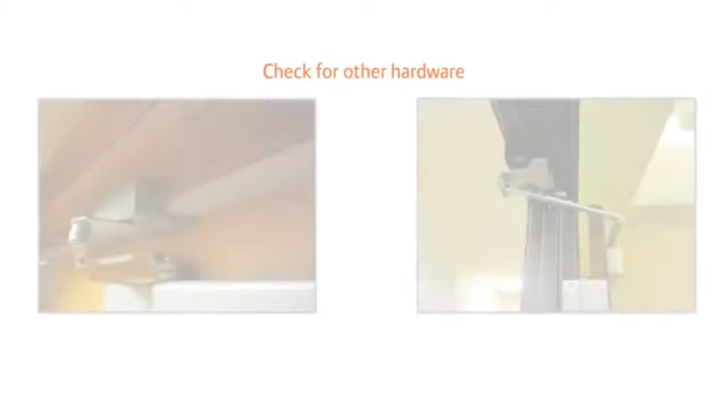If this is a new construction project, check the hardware schedule to confirm you have the correct closer for the opening. Check the opening for other hardware mounted on the top jamb. Items such as a coordinator or overhead holder can affect the installation of the closer, and special templates may be required.

Ensure the door swings freely, fits into the frame without binding, and that any latching hardware engages easily. There should be a 1/8 inch gap on the top and sides between the door and frame.

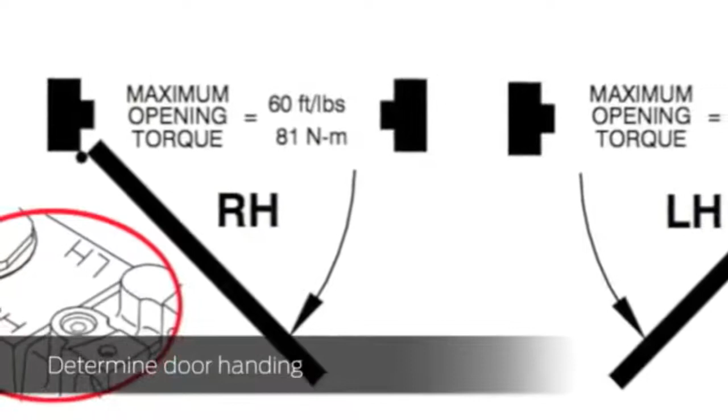First, determine the handing of the door. This chart, found in your installation sheet, can help you. Then, determine how far the door opens. This door opens to 90 degrees. Affix the self-adhesive template to the door, aligning the edge of the template with the hinge and top edges of the door, as shown on the label.

For doors that open from 100 to 140 degrees, place the line on the template along the hinge edge of the door, as shown on the label. For doors with pivots or swing clear hinges, locate the closer and shoe from the pivot point of the door.

Using the center punch, mark the 6 locations to be drilled on the door and frame. Drill 1/8 inch pilot holes through the template at all marked locations. Remove the template from the door.

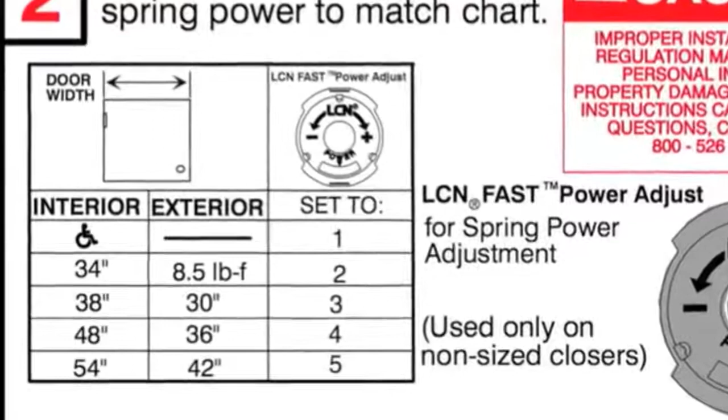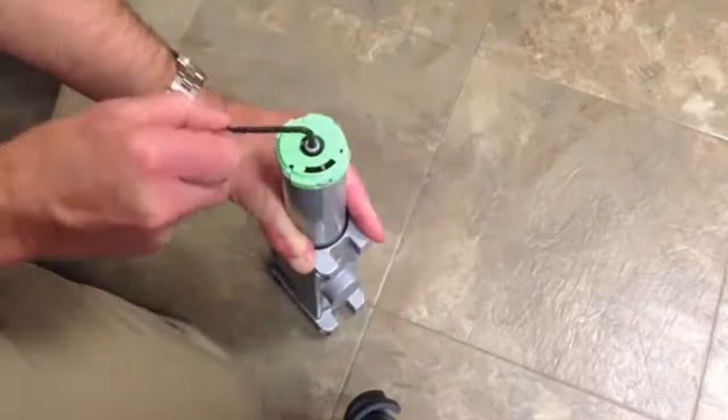The LCN 4011 spring power can be adjusted to provide proper closing force for your door. Please note, an improperly adjusted spring may result in personal or property damage. Using the chart in the installation instructions, determine the appropriate spring power setting based on the door width and the location of the opening. Adjust the spring to the correct number using the 5/32 inch hex wrench. Turn the screw until the proper number appears in the power window.

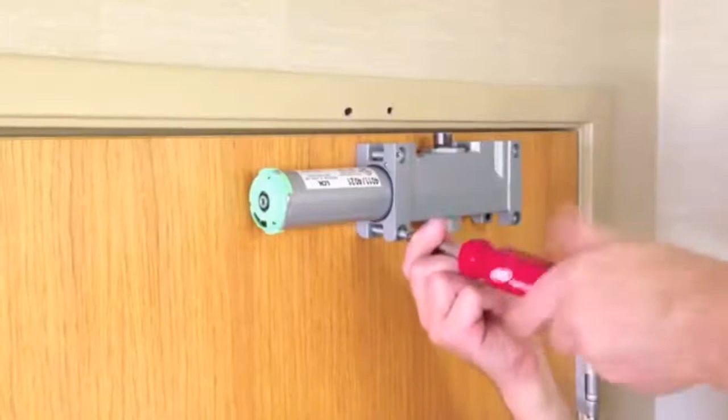Attach the closer to the door using the 4 screws. Self-reaming, self-tapping screws are provided as standard. Depending on your application, your supplier may have also provided wood screws, through bolts, and machine screws. Attach the rod and shoe to the frame using the 2 screws. Be careful not to over-tighten.

Attach the arm to the closer using the fastener provided. The arm may be attached to the closer prior to installing the closer on the door if it is more convenient to do so. With the door open, slide the arm over the rod and begin fastening the arm screw, but do not tighten. With the door closed, position the arm until it is 90 degrees from the face of the door. Then, tighten the arm screw.

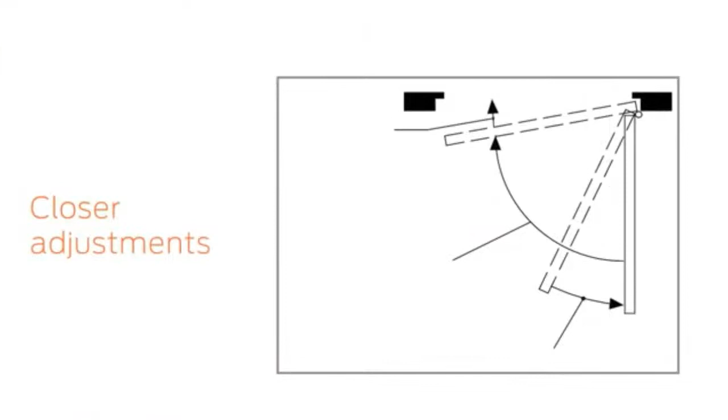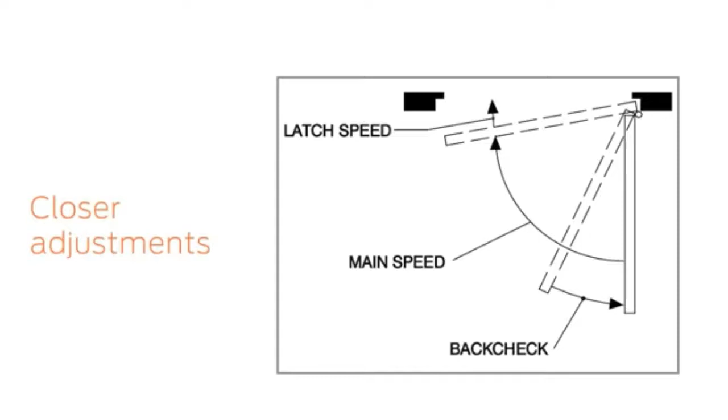Making adjustments to the closer allows you to control the motion of your door. There are 3 hydraulic adjustments that provide optimal door closer operation. The closer comes from the factory adjusted for a typical opening. Your closer may need additional adjustments depending on your installation requirements. To test the result of your adjustment, cycle the door twice.

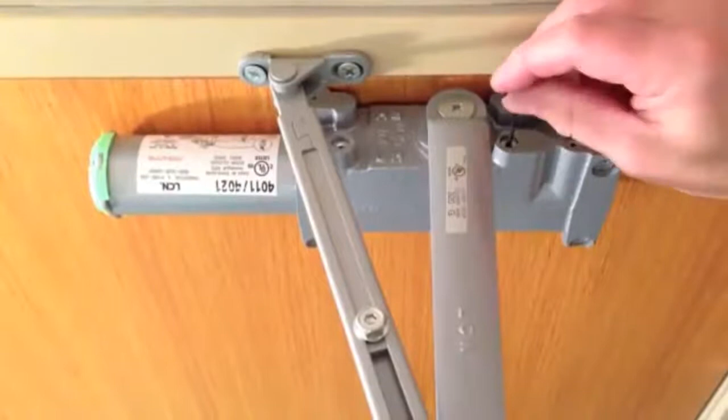Please note, do not back out the adjustment screws too far. If you are close to backing out the screw completely, you should feel increased resistance. Once you feel this resistance, do not back the screw out any further.

Back check is the hydraulic cushioning to slow the door as it opens. This usually starts at 70 degrees. The door will slow down to reduce wear on the door, wall, and hinges. Back check does not serve as a door stop. To adjust it, locate the back check screw, which is the screw farthest from the spring tube. Turn it counterclockwise 1/2 turn.

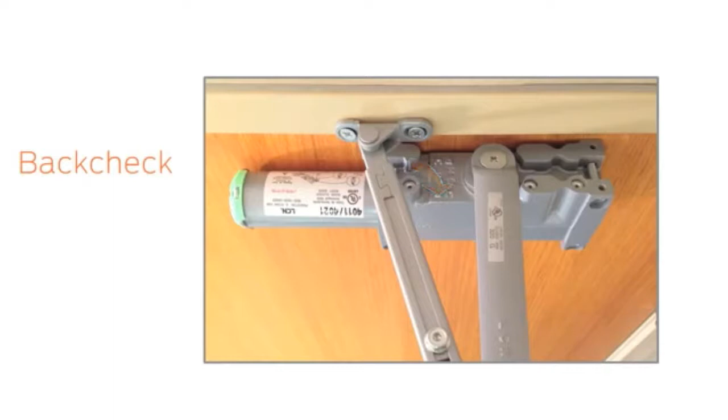Then, open the door to test. If additional cushioning is needed, turn screw 1/4 turn clockwise and retest. If less cushioning is needed, turn screw 1/4 turn counterclockwise and retest.

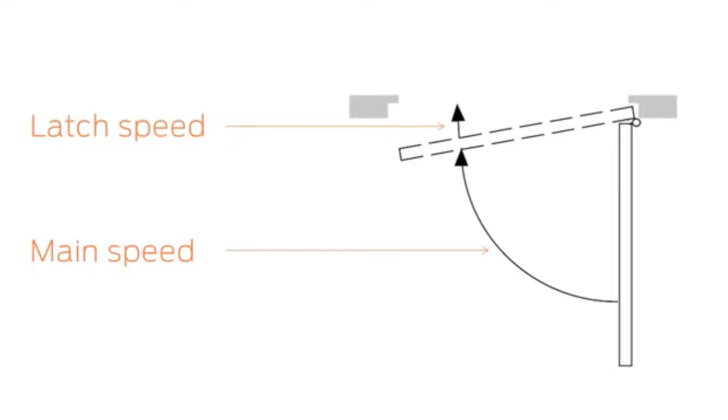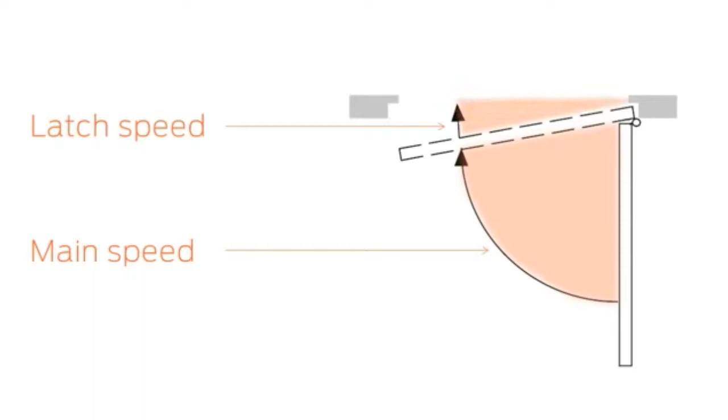The next two hydraulic adjustments are main speed and latch speed. The main speed is the speed at which the door closes from its fully open position to about 20 degrees. The latch speed is the speed at which the door closes during its last 20 degrees of closing. When setting these two closing speed adjustments, remember the Americans with Disabilities Act requires doors to take, at minimum, 3 seconds to close from 70 degrees to within 3 inches of the latch.

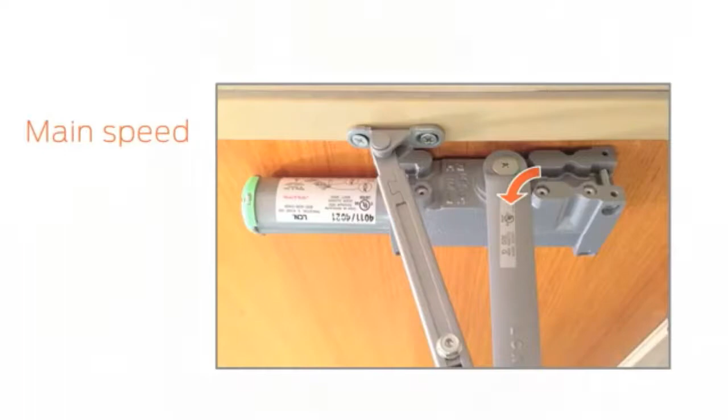The main speed screw is located on the front side closest to the pinion, where the arm is attached to the body. Make an adjustment 1/4 turn at a time, clockwise to decrease speed, counterclockwise to increase speed. Then, open the door all the way and release it to observe the closing speed.

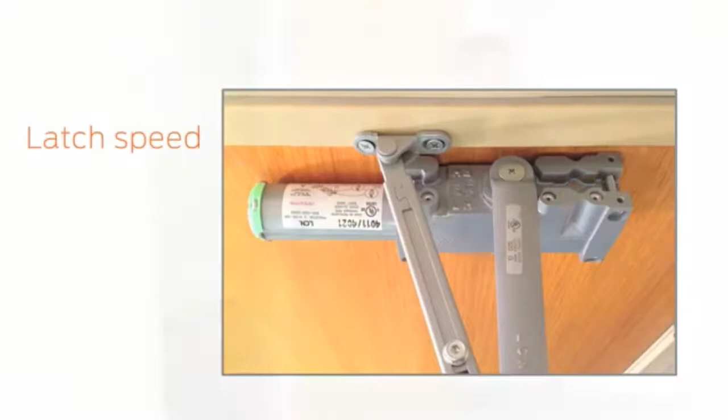Latch speed helps ensure the door latches properly. We recommend only small adjustments to latch speed. The latch speed screw is adjacent to the main speed screw on the front side of the closer. Make an adjustment 1/4 turn at a time, clockwise to decrease speed, counterclockwise to increase speed. Then, open the door all the way and release it to observe the latching speed.

If the door does not latch properly after adjusting the latch speed, you can increase the closing force by reversing the shoe. With the door open, hold the arm and loosen the arm screw. Carefully release the arm and disconnect the arm from the rod and shoe.

Rotate the shoe 180 degrees. Reassemble the arm, rod, and shoe. Be sure to position the arm at 90 degrees before tightening the arm screw.

If the door is still not latching, increase the spring power for additional closing force. Keep in mind, this will require more force to open the door. To complete the installation, attach the cover with the 2 fasteners.